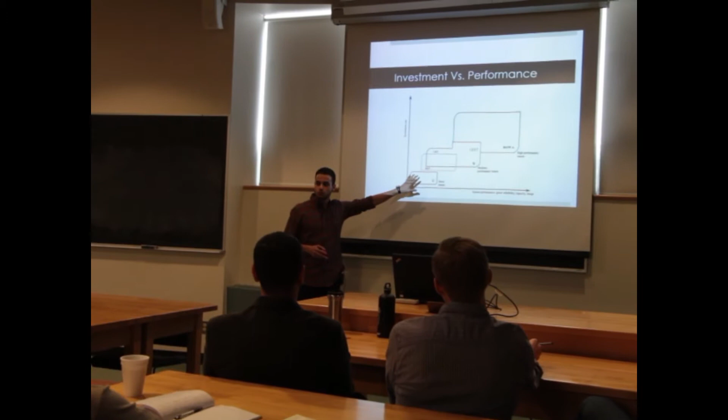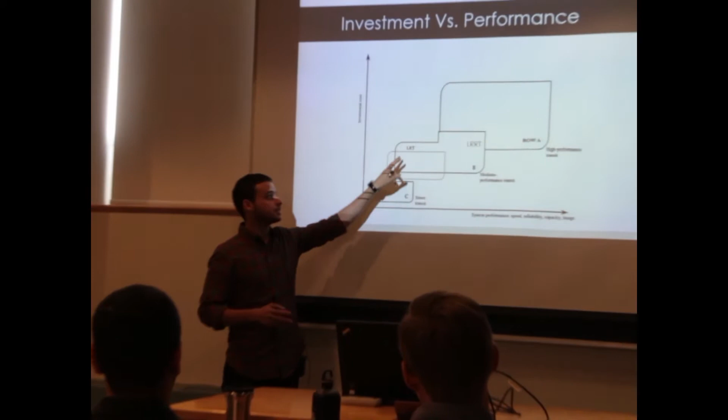If you look at this chart here, you have investment cost on the y-axis and performance on the x-axis. So here are right-of-way C modes, streetcars: poor performance, low investment cost. You go a little higher in cost, you get more performance: BRT, LRT. And then at the very end, you can get light rail rapid transit, which is the higher level of LRT, like LRT vehicles running on subway tracks. That's the difference between the two.

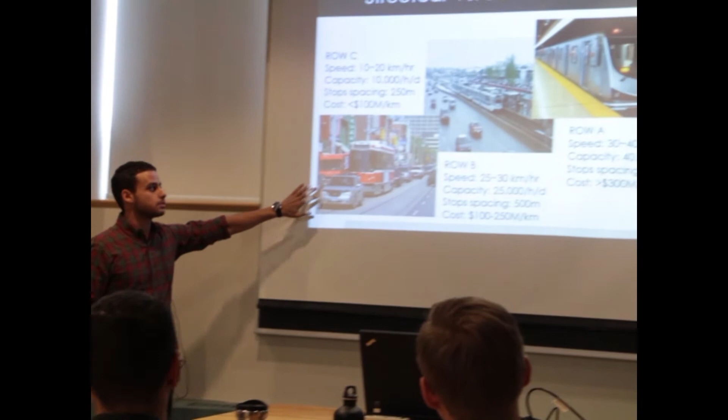And then you go to right-of-way A, where you have subway, commuter rail: very high investment cost, but it comes with the best performance. So quickly, what are the differences between streetcars, light rail transit, and subway? These are running on right-of-way C, B, and A.

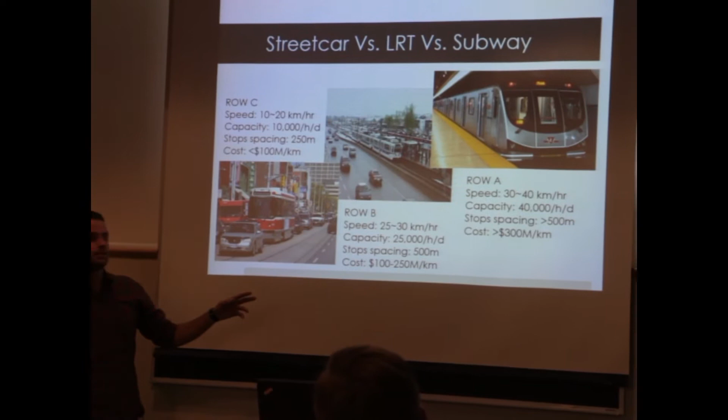The average speeds are 10 to 20 kilometers per hour, which you can usually bike faster than. LRT has a higher speed, 30 kilometers per hour, and subway goes up to 40 kilometers per hour. The capacity increases from streetcars to LRT up to 40,000 passengers per hour per direction for subway. And then the stop spacing is also increasing from streetcars, LRT, and subway. That means more accessibility for streetcars, less for subway, but faster travel time for subway than streetcars.

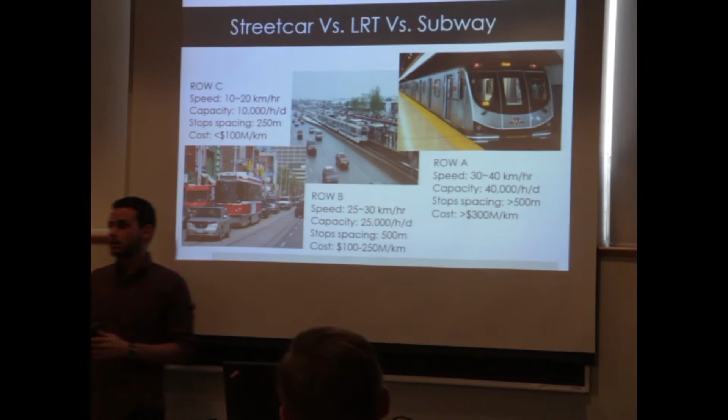And then the cost is a very important factor here, because when we talk about streetcars, it's less than $100 million per kilometer, but for subways, it's more than $300 million per 1 kilometer. That's too much. So if we don't need subway, and we just use streetcar or LRTs, think about the saving in money that you can use to increase the system accessibility, so you can go further, create more lines with the same amount of money, but with a less capacity or less performance transit mode.

There are two differences between streetcars, LRT, and subway. Those take the power from overhead cables. In subway, it's mostly from the rails. Streetcars are different than LRT in that for streetcars you need a loop to make a U-turn at the terminal stations, but LRTs are double-ended trains like the subway, so it saves time at the terminal stations. LRT and subway, you can see here, have boarding at the same level of the train. Streetcars, you have to climb the stairs.

So those are the major differences. Again, same thing between LRT and BRT. If you think of BRT, think rail, use bus. It's the same idea of light rail transit, but on a street, not rails. LRT actually has better performance with the same passenger volume, because it's faster, has more capacity, and it has lower operation costs as well, because with more capacity you need fewer vehicles, and that includes the most expensive part of running a transit system, which is the driver cost. So you need more transit vehicles here, you need more drivers, it's more costly.

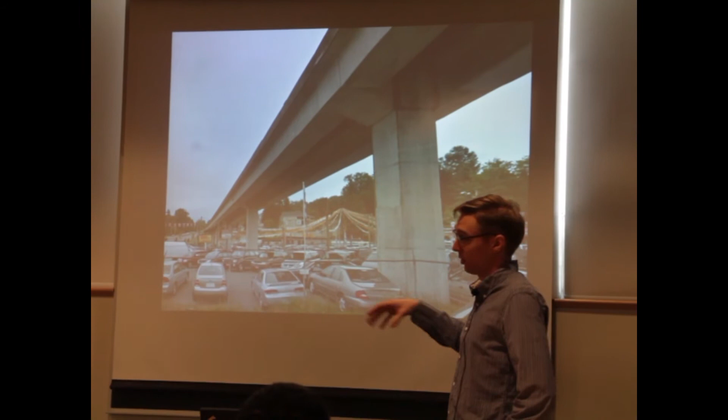The piers are cast in place, and then basically you just have a crane, you pick up each girder in one piece, and then at this point here, there's an expansion joint, so it sits on bearings. Over here, you'd support it on some temporary falsework, and then you'd pour your closure joint. So these girders are continuous over typically 2 or 3 spans, which adds to the efficiency of the system.

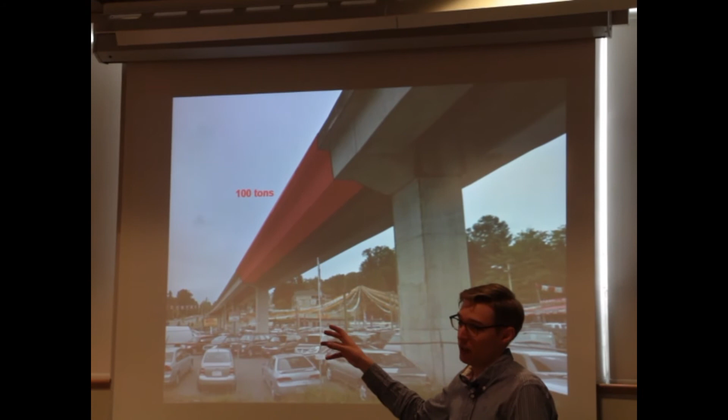The drawback maybe of this system is that each one of these girders weighs about 100 tons, which is a substantial thing to transport, to pick up, to move around, to line into place, especially when you consider that they're not all straight. So the way they fabricated these girders was they had special formwork specifically for this project that was articulated. So they could arrange the segments of the formwork to form a curve in plan or a change of elevation or twist, whatever was required for the alignment of the track could be matched with the girder.

And the advantage of that is that it moves a lot of the fabrication effort away from site where you're imposing on the neighborhood to a precaster's yard where it's controlled conditions. You can set things up. You have more control over the fabrication process.

But I think a problem that they had with this was that these big heavy girders, especially the ones that are curved, were kind of difficult to transport to site. They probably needed special permits and police escorts, that kind of thing, which adds to the cost of the system, right?

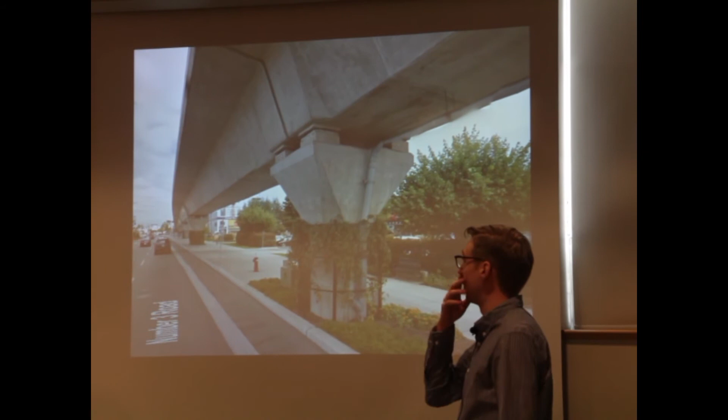So with the newer line, and not just in Vancouver, there's a new line in Calgary that's built. It looks almost identical to this. There's a line in London, England that again looks almost identical to this. So the whole industry is kind of moving towards this kind of system in the last few years. And the reason for that is that this is precast segmental.

So rather than having precast girders, just what's highlighted in red there is cast in one piece at the precaster's yard. And then these segments are shipped individually to site, and then there would be an overhead truss that would sit on this pier, and this pier.

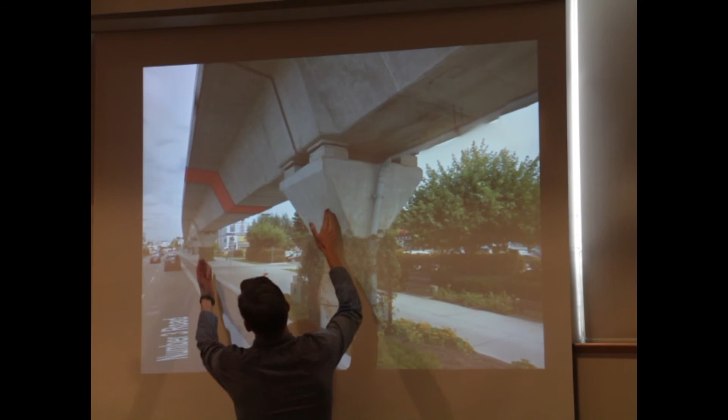And then if say this span was already constructed, this span would have a truss over top of it, you'd bring all of your segments in, they'd all be picked up, supported by the overhead truss, and then they're post-tensioned together. Then you grout the tendons and then set it down, and then you move your truss over so that it's ready to make the next span. So that's a system that's called span by span precast segmental construction. And it's a procedure that's used fairly commonly for highway bridges as well.

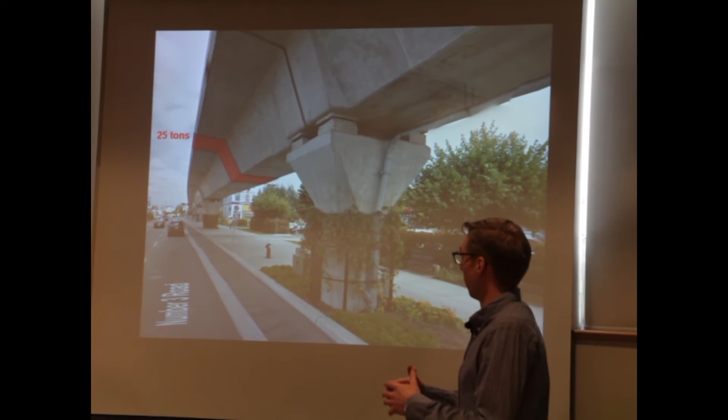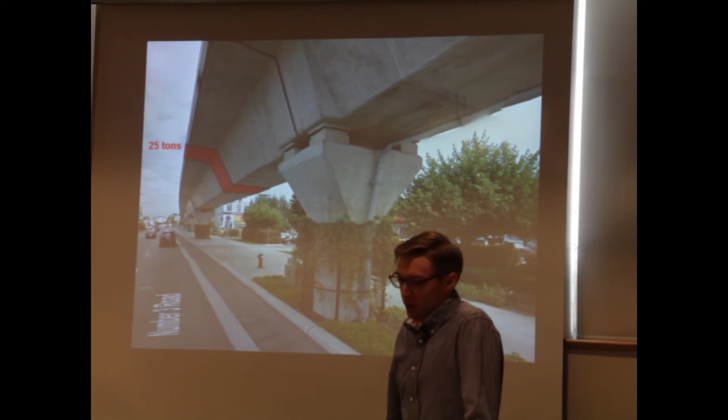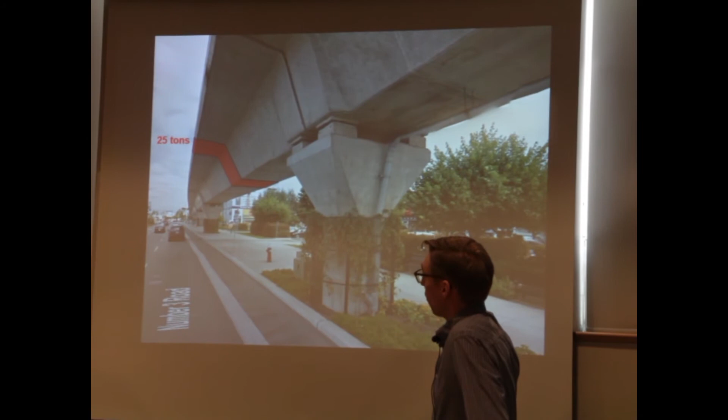So contractors are familiar with it, and it has the advantage that each of these segments, rather than 100 tons, is 25 tons. They're all the same size, they're all the same shape. They're 3 meters wide, which is within trucking clearance, so you don't need special permits to move them around, typically. So I think that's probably the reason why we've gone to this system for most recent constructions over the earlier Expo line structural system.

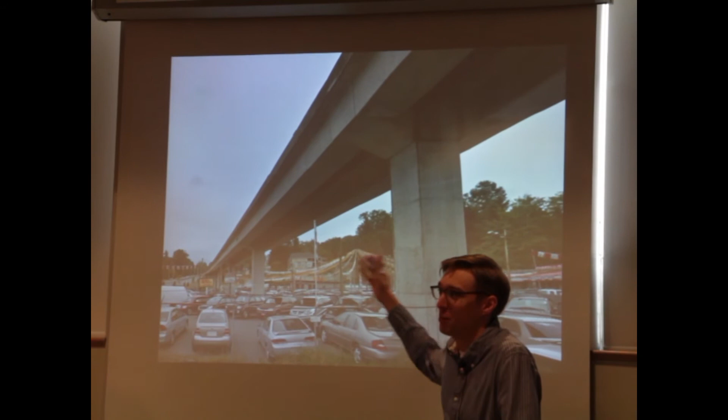But there's no denying that if it was me owning this car dealership, I'd be happier with this passing over my lot than something like this.

So with my own research, I'm looking at how can we get back to a system of precast girders, and how can we use new materials like ultra high performance fiber reinforced concrete and fiber reinforced polymer. So materials that have higher strength and higher stiffness per weight. So we can make a girder that rather than weighing 100 tons weighs, say, 40 tons.

So now, you pay a lot more for the materials to make the girder, but there's a lot of trickle-down savings associated with the lightness of the girders. So you don't need post-tensioning anymore. The cranes that you need to lift into place are lighter, easier to find. And so the hope is that we can use these new materials in a smart way to make the elevated option of achieving, I guess, right-of-way A more palatable for those who have to pay for it.

So, any questions? Yeah. Thanks.

Looking at a lot of structural and really analytical ways of looking at things, I just want us to take a step back and think about the fact that at the end of the day, people are going to be using these systems. And obviously, one very important fact about that is that in order for these systems to be successful, you need to have people to ride them.